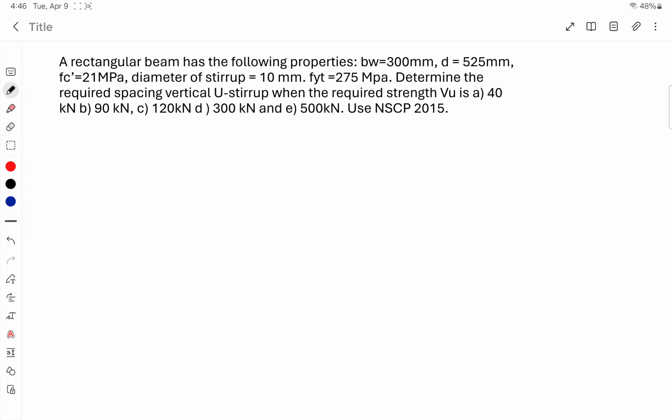So let's number this problem 1. We have a rectangular beam with the following properties. We have the BW or B equal to 300. Let's draw it first. Okay, hindi siya pantay, okay.

We have the BW 300 and then the D or the effective depth, which is equal to 525. We also have the strength of concrete FC prime 21 MPa, the diameter of stirrups at 10 mm, and then FYT at 275. So the unknown here is the required spacing for the vertical stirrup.

S is what we're looking for here, when the required strength VU is varying each problem or item. So letter A, we have the VU which is equivalent to 40 kilonewton.

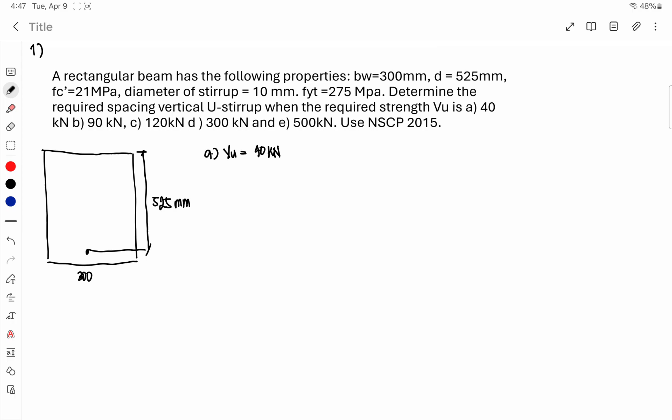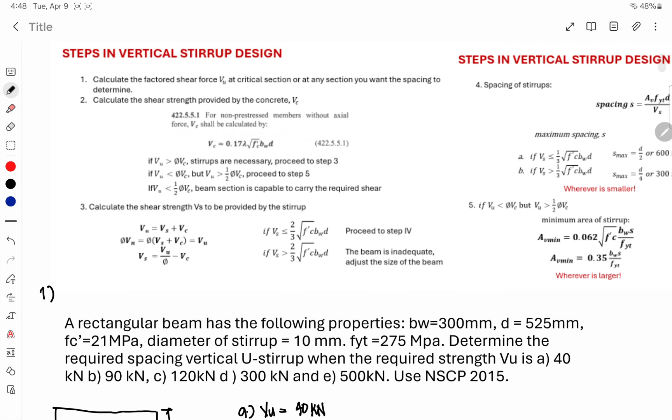Okay, so let's do letter A first. Let's check again our process or steps in vertical stirrup design. So first, calculate the shear force VU. But in our case, VU is given, so this is what we'll use.

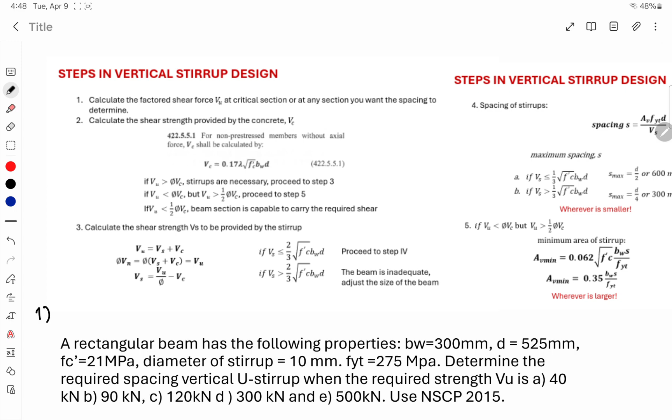Okay, so next, calculate the shear strength provided by the concrete, VC, wherein for non-prestressed beams without axial force NU, VC shall be calculated by this formula. We have VC, so let's compute first the VC.

We have the formula 0.17 lambda root FC prime BW D. We can also use 1/6 since it's more exact, no? So let's just use 1/6 so it's better.

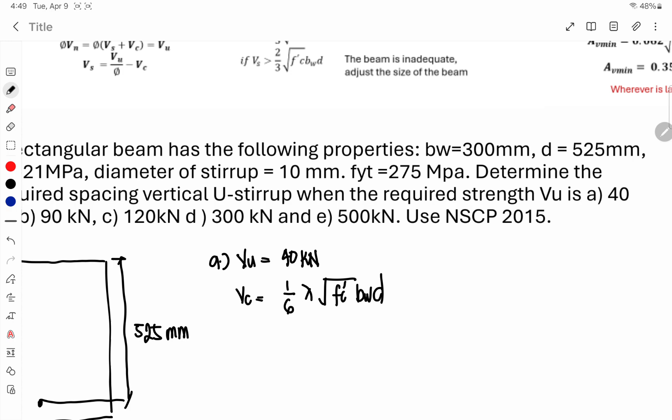So this is the strength provided by the concrete.

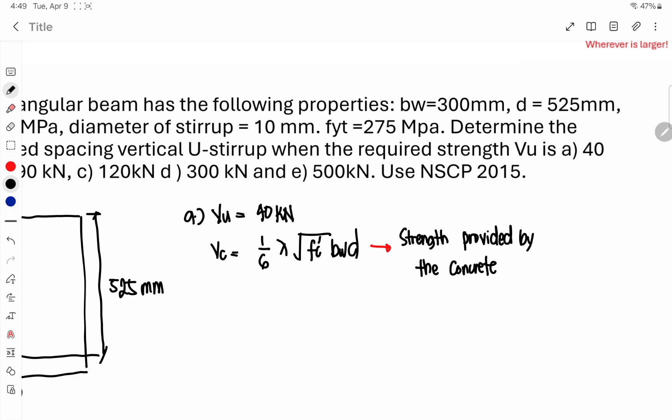So let's compute it first. This is the second step. Our VC, we have 1/6.

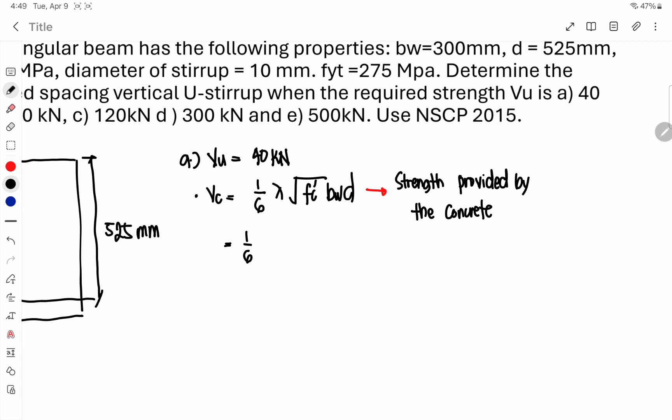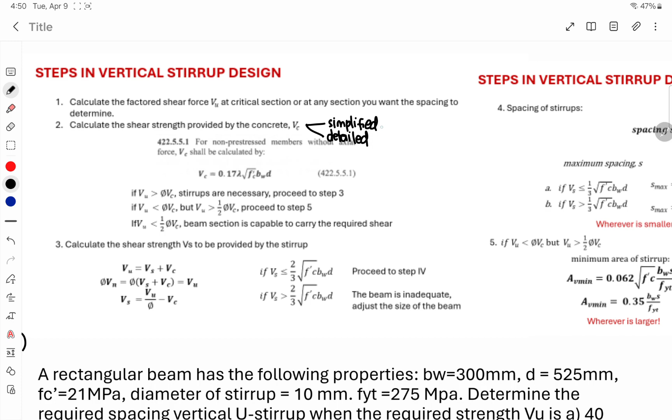So here it's divided into two processes. We have the simplified VC, which we discussed previously, and then we have the detailed one, wherein in our problem, when it's not stated whether detailed or simplified computations should be used, we will use the simplified calculations. So in our case, let's use the simplified calculations, this is the formula. The detailed one we already discussed is in the PowerPoint.

So the simplified one is this. For our lambda, the problem didn't state what kind of concrete, so we will use lambda equivalent to 1, wherein 1 is normal weight concrete. When it's not stated, we automatically assume normal weight.

Then we have the square root of FC prime, which is 21 MPa, and the BW or width of the beam at 300, and the depth or effective depth at 525.

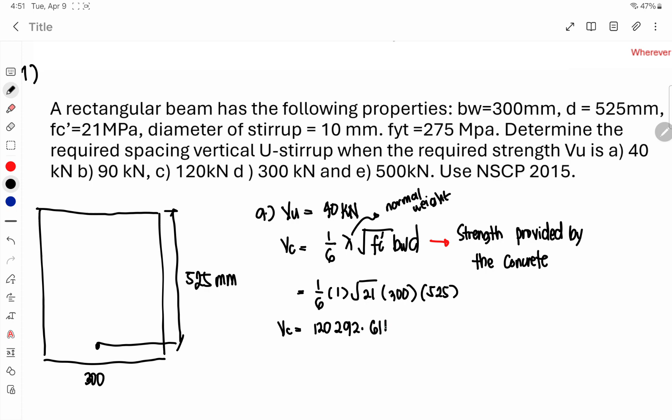So computing for the value of VC, we can get 120... 0.29, I think. Let me double check. Yan, tama. So we can compute this since it's in mm and this is MPa, so we can compute this in Newton. 120,292.612 Newton.

So we want it in kilonewton since that's what we need. So let's convert it. Divided by 1,000, we have 120.293 kilonewton. So that's the value of VC.

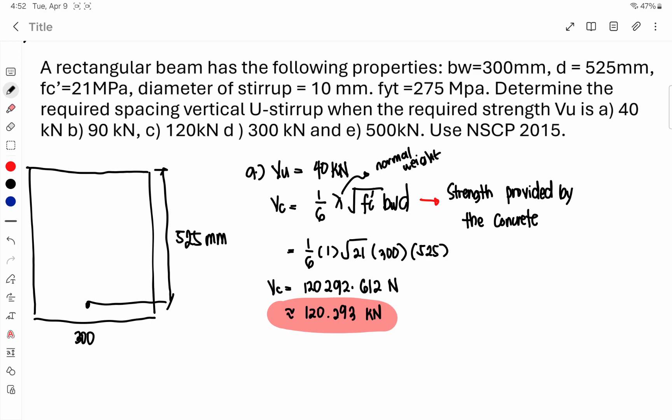So next, let's solve this. Let's check the value of phi VC.

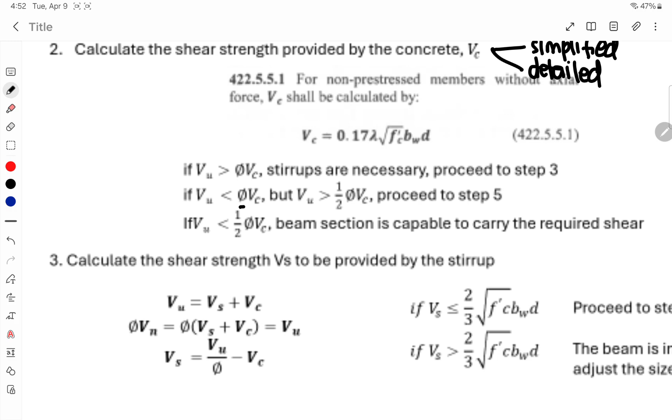If VU is greater than phi VC, we will proceed to step 3. If it's less than, but greater than half of it, we will proceed to step 5.

In step 5, we compute the minimum area of stirrup. And then lastly, if less than, the beam section is capable to carry the required shear.

So meaning, no more computations needed, we stop here. The beam section is capable to carry the required shear, so we don't even need to compute the spacing anymore, that's already our answer.

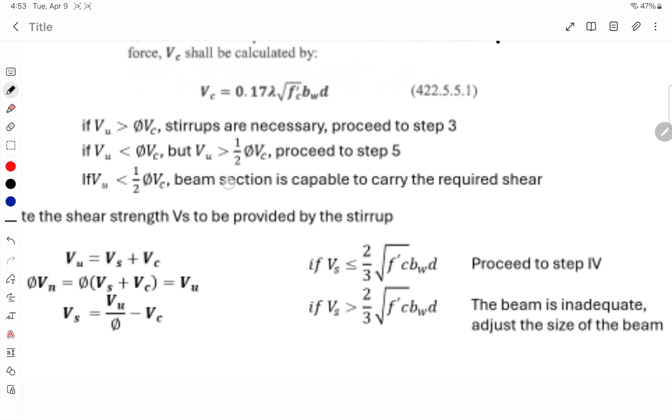Okay let's try it. So let's compute first the value of phi. Let's do it here, on the other side. Letter A pa lang naman. Phi VC - our phi for shear is always 0.75.

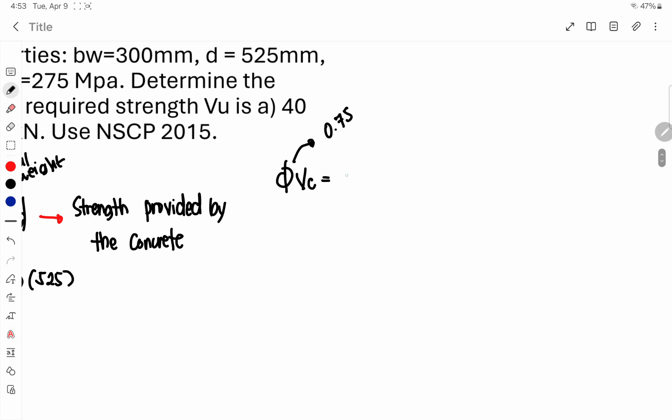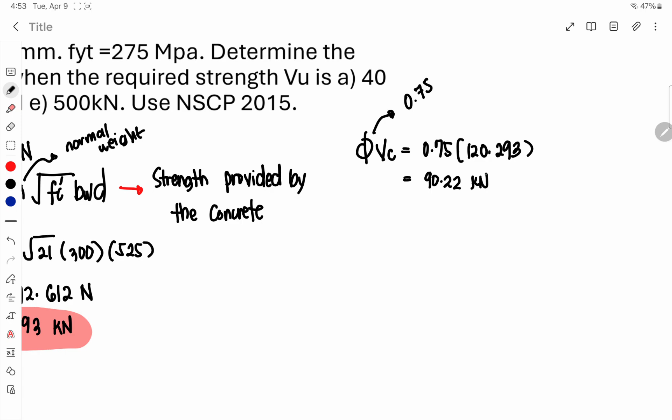0.75 multiplied by the VC, 120.293. We can get the value of phi VC, which is 90.22 kilonewton.

So let's compare this value to VU. We have our VU equal to 40 kilonewton. So is it less than or greater than? Our VU is less than the value of phi VC.

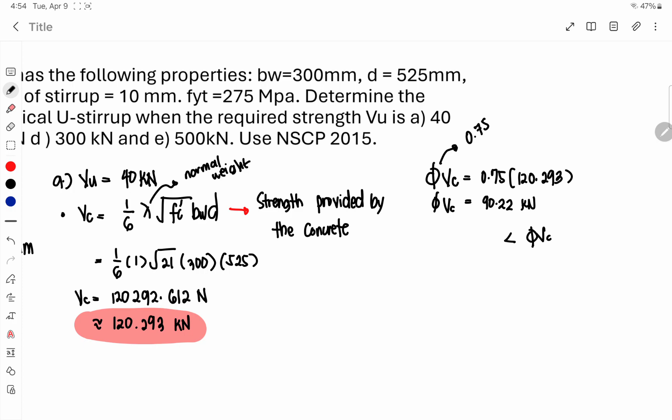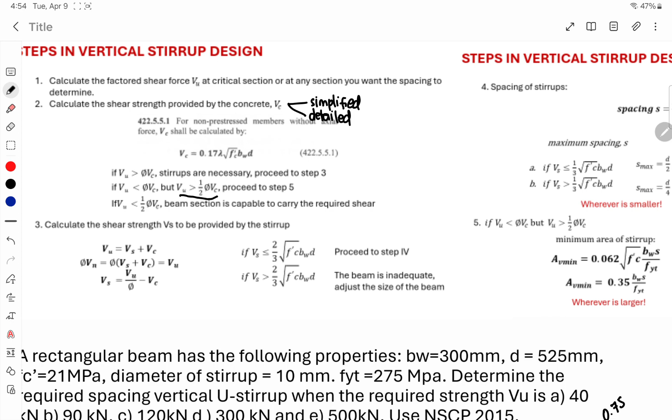So, ano ang pwede nating sabihin? Kapag less than, ito na. Kailangan nating i-check yung value pa ng kalahati nito. So yung VU natin, VU is less than phi VC. Kailangan nating i-check pa ito, yung kalahati ng phi VC. So 1/2 phi VC, divide 2 nyo lang, equals 45.109 kilonewton. So as you can see, yung VU natin is less than pa rin dito sa value ng 1/2 phi VC. So therefore, yung VU natin is less than pa rin 1/2 phi VC.

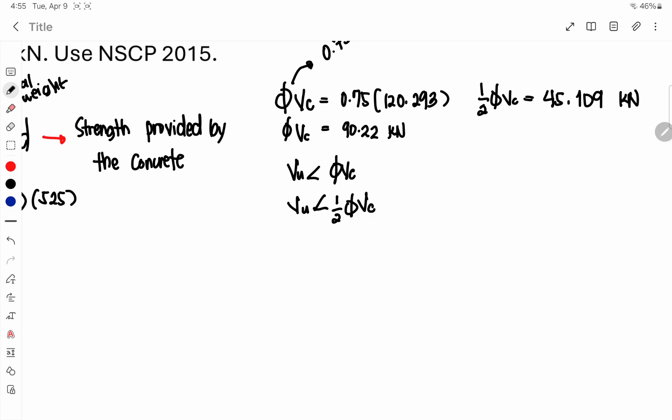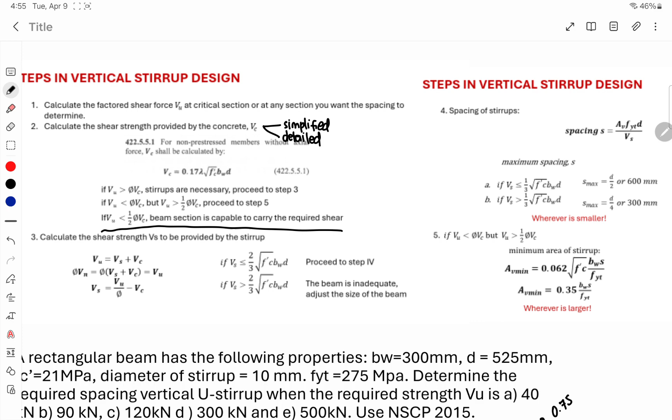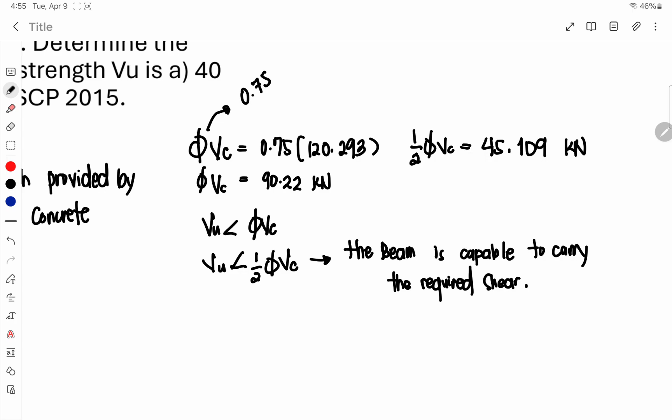Therefore, yung procedure natin dito is this: the beam is section. So with these calculations, with a given value of VU na 40, the beam is capable to carry the required shear. Yun na yung sagot. Okay, letter A. Easy peasy, 5 points.

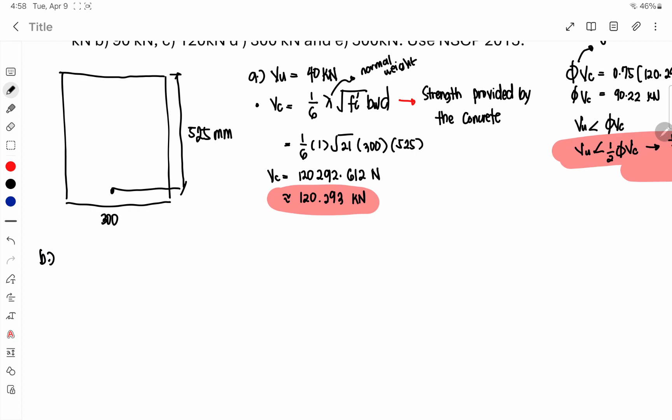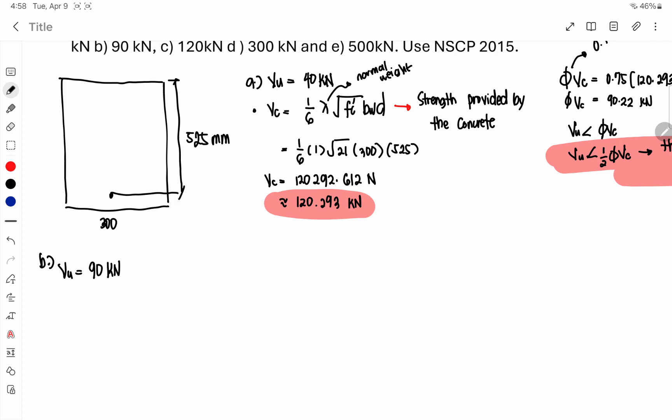So next, we have letter B, which is equal to, yung VU natin is equal to 90 kilonewtons. So same, meron na din tayong VC. Same lang naman yung VC sa lahatan, no? So we can check already the value ng φVc. φVc natin is equal to 90.22. So greater than pa rin siya, tama? I mean less than pa rin siya, no?

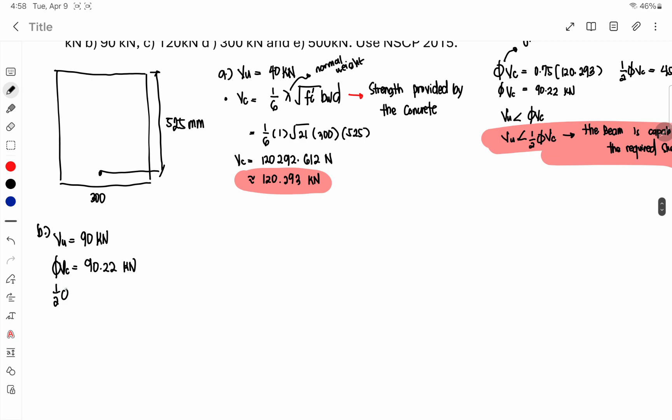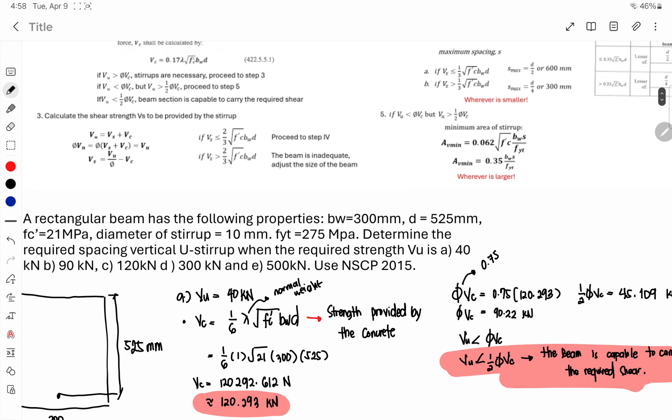But greater than na siya sa 1/2 φVc. 1/2 φVc, which is equal to 45.109 kilonewton. So with this, pwede nating i-determine yung condition nito. VU is less than φVc, which is correct, since yung 90 natin is mas maliit compared sa 90.22. So here we have VU is less than φVc, but greater than sa 1/2 φVc. Nagets ito?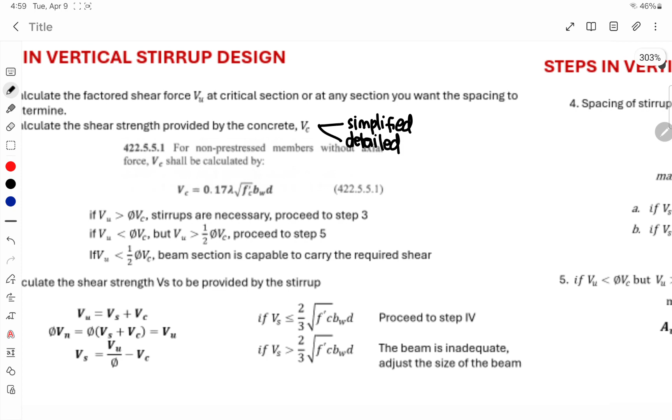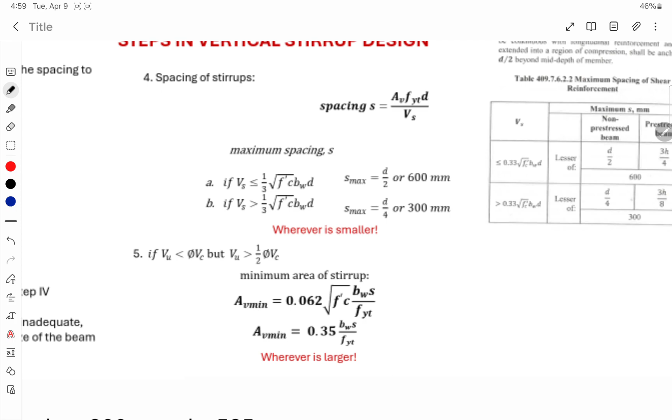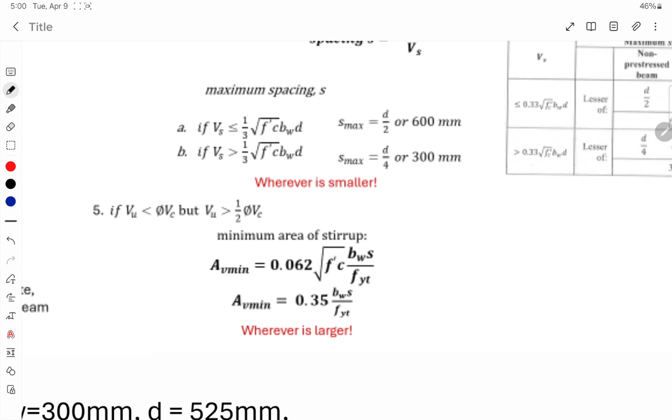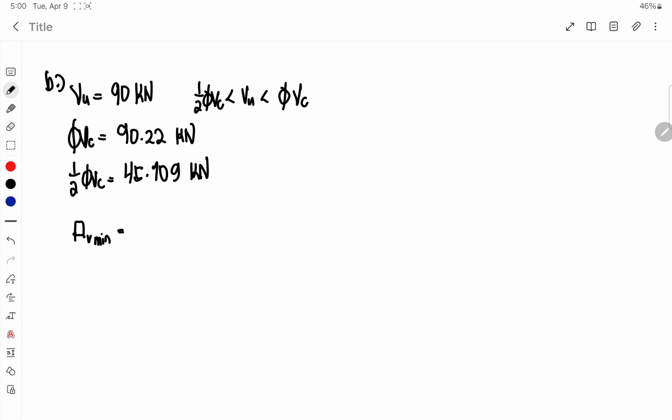So with this, proceed daw tayo sa step 5. Wherein yung step 5 natin is equal to ito: if VU is less than phi VC but VU is greater than 1/2 phi VC, ito na yung gagamitin natin. Wherein makakompute na tayo kaagad ng value ng spacing, no? So paano natin ma-solve to? We have 1/2 phi VC, VU, phi VC. So kailangan natin isulat lang yung area minimum natin, area ng stirrup na minimum, which is equal to, meron tayong dalawang pagpipilian dito. Tapos kung alin yung mas malaki, of course, pero kailangan natin i-check siya both, no?

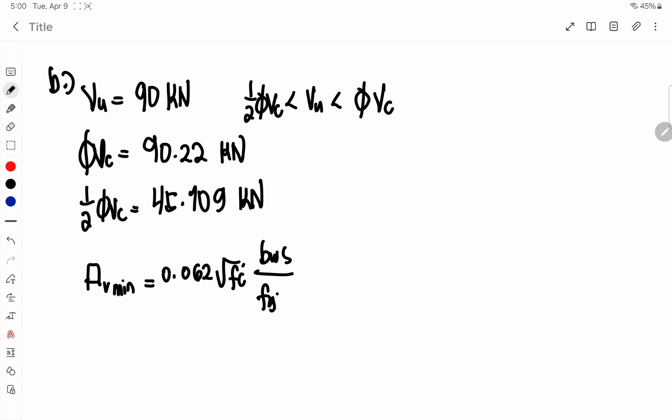So ayan, check natin. AV min, we have 0.062 square root of FC prime, BWS over FYT. And then isa pang AV min is 0.35 BWS over FYT. So meron na kayong given na formula. So with this, kaya nating ma-solve yung spacing natin both. Yung spacing natin dito, yung kukunin natin, syempre yung mas maliit. Tama, spacing yan eh.

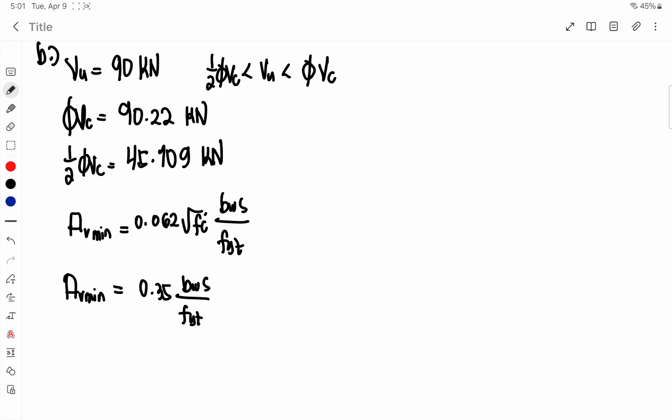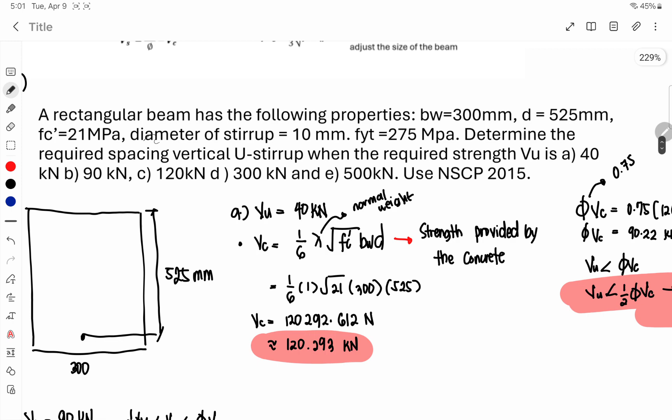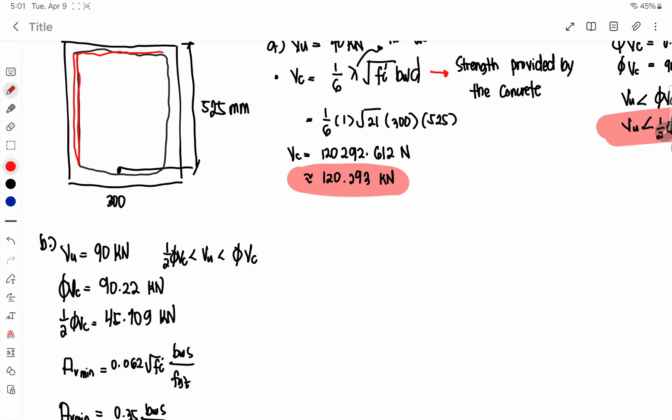So ano ba yung AV min natin? Sa problem natin, yan na yung area ng stirrup. So with this, binigay naman sa atin yung diameter of stirrup na 10 mm. At yung AV min natin is yung area ng stirrup na nagre-resist ng shear. So kung ito yung stirrup natin, saglit na, ayusin ko na. Ito, so yung shear natin is pag ganito, may dalawang force na nagre-resist kasama yung concrete. Ito na yung area ng AV natin, or yung ating area ng stirrups, wherein i-consider natin kung ilang legs yung stirrups natin. Hindi naman pwedeng isa lang yan, no? So sa ating case, kapag hindi sinabi, automatic assume natin is dalawang legs.

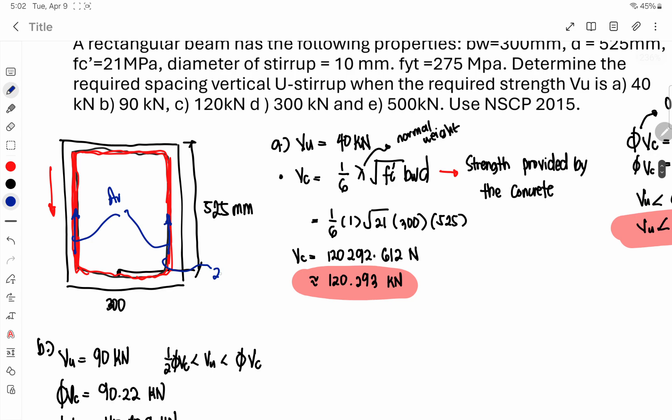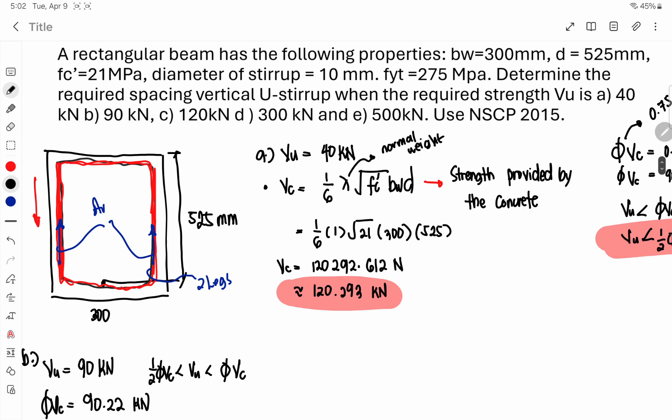Okay, so isulat natin dito yung AV min. We have pi over 4. Ilan yung diameter niya? We have 10 mm, 10 squared times 2, since 2 legs. Okay, it is equal to 0.062 square root of FC prime 21. Okay lang, so we have the BW na 300, and then the S na unknown, all over FYT na given, we have 275. So with this, we can compute for the value of S. S natin is around 506.

O ito, simplify nyo na lang siya para mas madali, no? So pwede nyo gawin is S is equal to, itaas nyo doon, AV min times FYT, tapos ibaba nyo yung 0.062 para di na kayo mag-ship solve ng BW. Ganun. Minimum area of shear reinforcement, diameter ng bars, pi over 4 then squared 2, FYT 275 divided by 0.062 square root of FC prime 21 times the value ng BW. So tama, 506.79 mm.

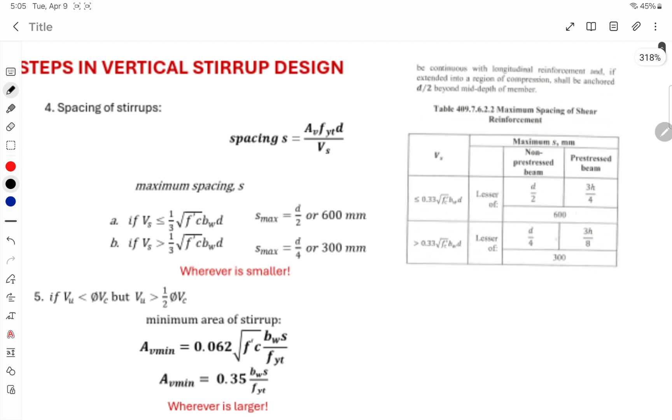Okay, so ito na ba yung sagot? Pipili lang na mas maliit tapos ito na? Hindi, no? So kailangan natin i-check, of course, yung maximum spacing of shear reinforcement natin. Kailangan natin i-check to kasi what if yung maximum pala is 200 lang, so lalagpas na ito. Kung ma-observe nyo, malalaki yung spacing niyan since yung VU natin is maliit lang. So kapag maliit lang yung VU natin, kokonti lang yung i-resist ng ating shear reinforcement, kaya kahit luwagan natin, 'di ba?

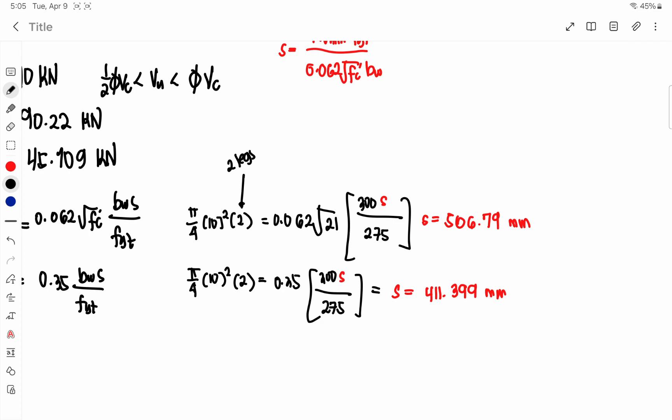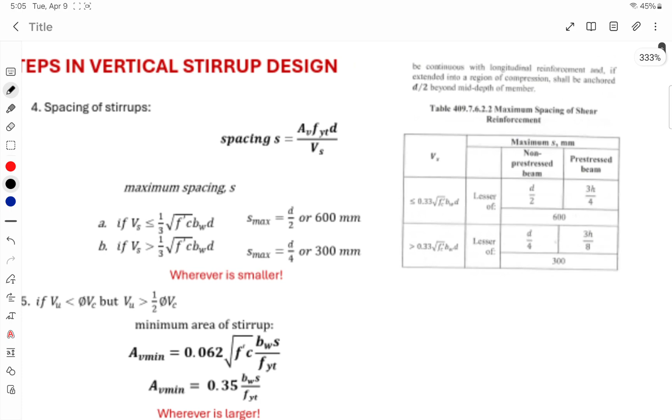Kahit luwagan natin yung spacing, okay na okay tayo. Pero dapat hindi tayo lumampas sa maximum spacing niya. So with this, kapag mas maliit yung VU natin, of course, yung gagamitin nating maximum spacing dito is ito. Kapag malaki naman, kailangan masinsin dapat. So ito naman yung pipiliin nyo.

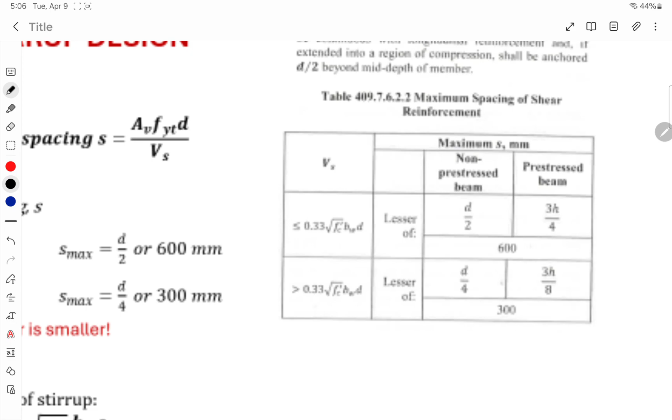Pero in our case, ito yung pipiliin nyo since naka minimum naman. Kapag minimum, automatic ito na yung gagamitin nyo. Minimum lang naman, so kapag minimum, ito yung gagamitin nyo. So we have the D over 2. Lagay lang natin dito, tapos 600 S.

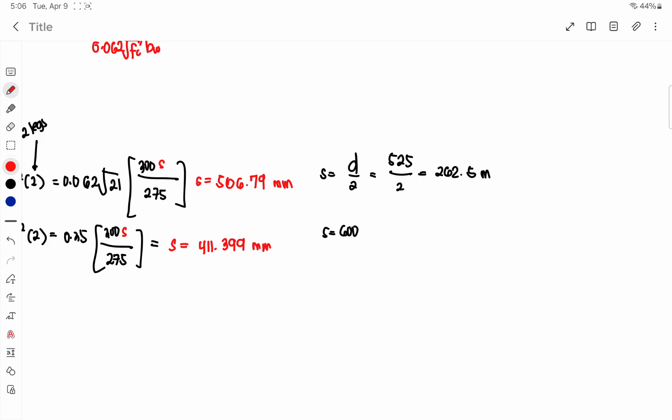So D over 2 natin is we have D na 525 divided by 2, we have 262.5. So among the four, we can say that the lesser value or the smallest value of spacing is this one. So nagpara-compute pa tayo nito, pero ito lang yung gagamitin. So of course, kailangan nyo din ma-check, ito yung maximum.

For letter C, we have the value of VU na 120. Ay, shucks.

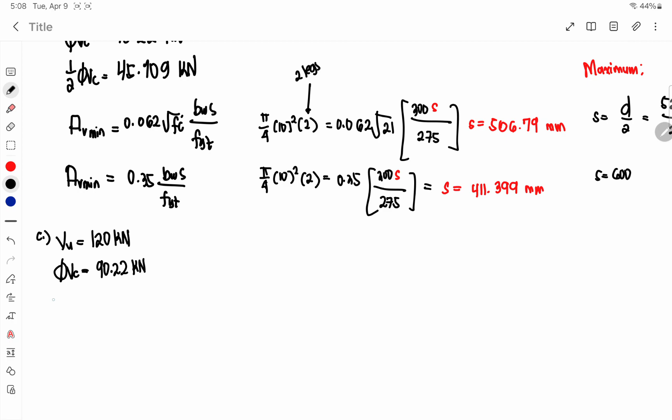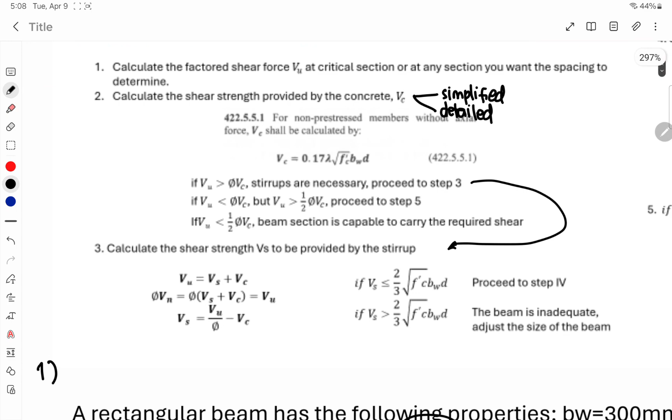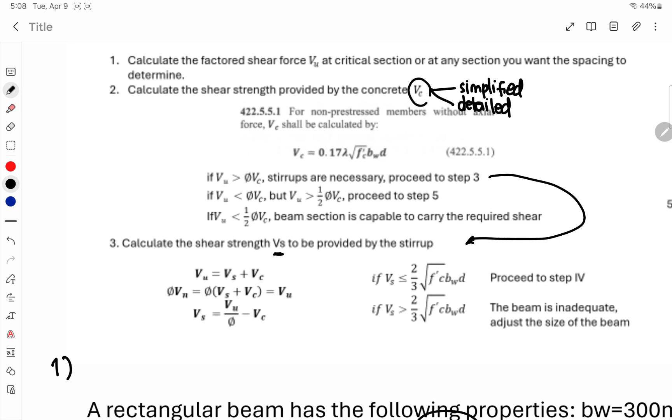So ayan, check natin yung phi VC natin, we have 90.22. So greater than na yung VU natin sa phi VC. Therefore, proceed tayo dito sa step number 3 na calculate the shear strength VS to be provided by the stirrup. So kung yung VC natin is provided by the concrete, ito naman VS is provided by the stirrup.

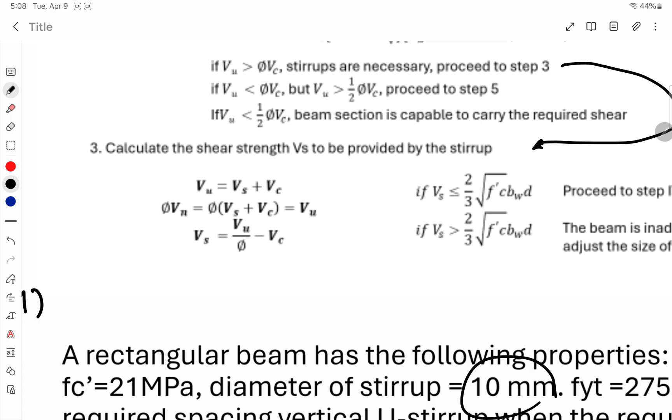Wherein, to compute, meron naman tayong main equation dito na VU is equal to VS plus VC. Okay, so VS natin is equal to VU over phi minus VC. Compute for VS, we have the value of 120

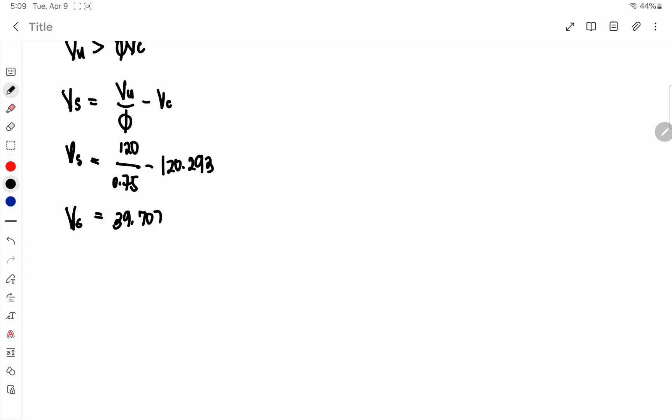over phi na 0.75 minus VC na, magkano yung VC natin? 120.293. VS is equal to 39.707 kilonewton. So with this, meron na kayong VS.

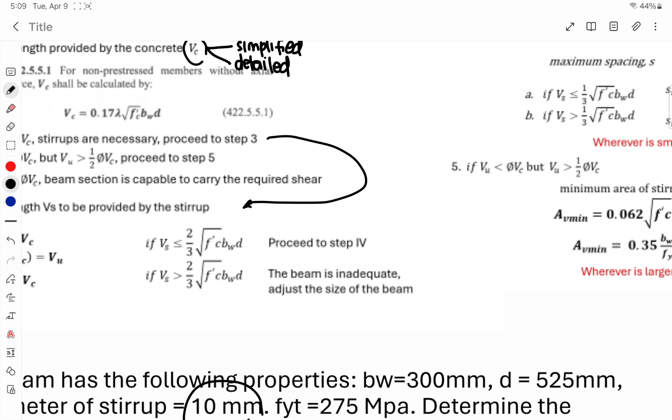Next step nyo is compare the VS into this 2/3 of FC prime BWD. Kapag less than yung nakuha nyo sa 2/3, proceed kayo sa step number 4, spacing of stirrups. Kapag naman greater than, the beam is inadequate, meaning mag-adjust kayo ng sizes ng beam. Palitan nyo yung size ng beam, tapos proceed ulit kayo sa step 1.

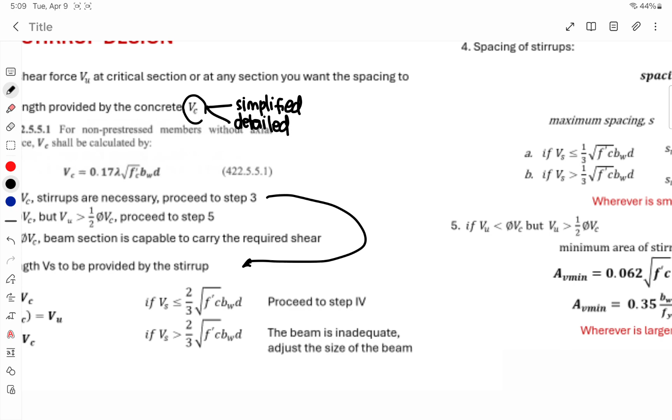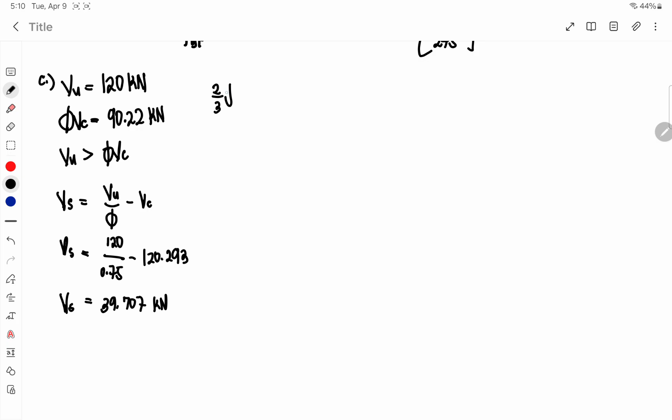Okay, so in our case, check lang natin yung value ng 2/3 square root of FC prime BWD. 2/3 natin is equal to, yung 2/3 FC prime natin is equal to 21. We have 300 and then the D na 525. Value of this is equal to 2/3 FC prime 21, 300, 525. We have 481.170 kilonewton.

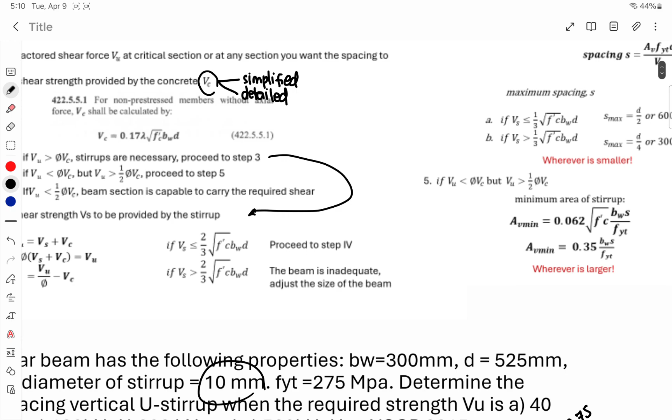So ano nakikita natin dito? We have VS is less than, very very less than. So meaning, VS natin is less than 481.70. Proceed to step number 4. Kaya na nga natin ang step 1, 2, 3, 4.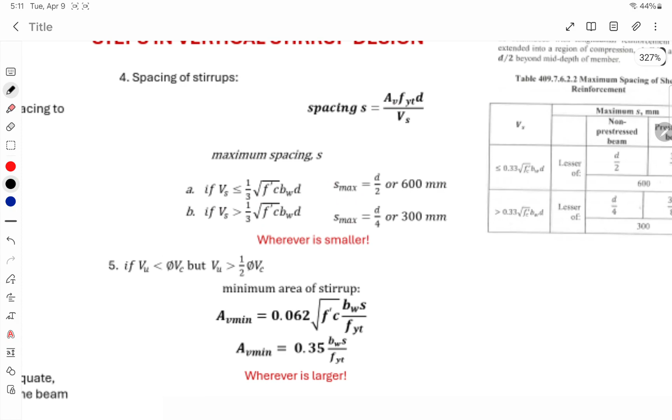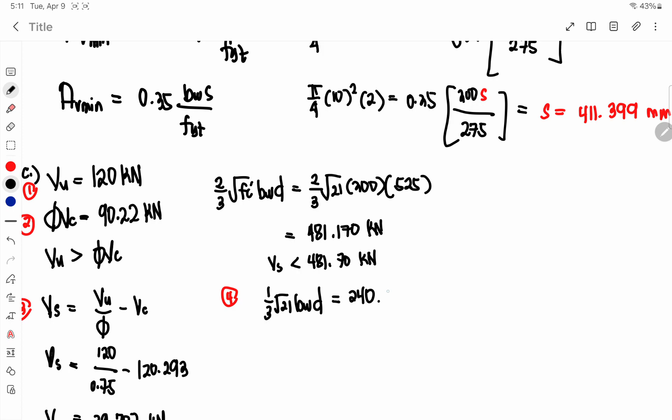Step number 4 natin, compared naman natin ulit yung VS natin into this 1/3 FC prime BWD. So check lang natin, palitan nyo lang to ng 1, yung 2/3 nyo naging 1/3. 1/3 natin of square root of FC prime BWD is equal to 240.585 kilonewton. So from this, may check natin yung VS natin is less than 240.585 kilonewton.

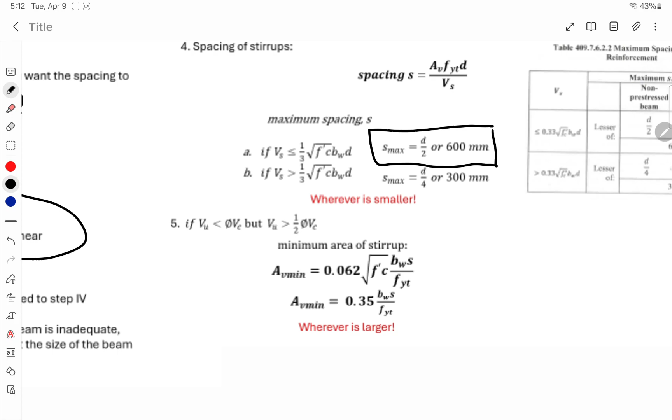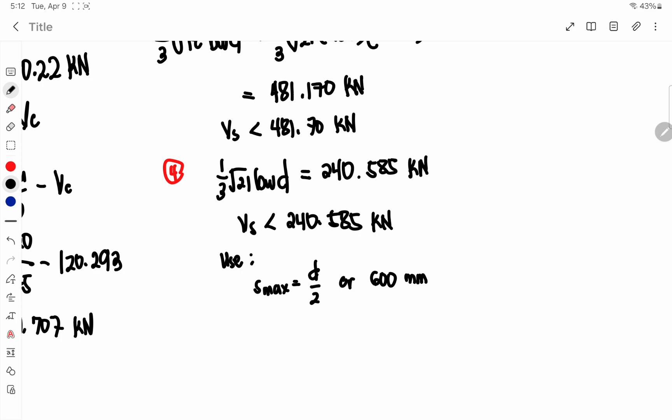So meaning less than tayo, so meaning yung S max natin na gamitin is yung mas maluwag. Kapag mas maliit yung VS, kakonti lang naman yung i-carry niya. So kahit luwagan natin, we can use S max na D over 2 or 600 mm. And of course, kailangan nyo din i-check yung value ng spacing niya mismo, galing dito sa VS. Ito na.

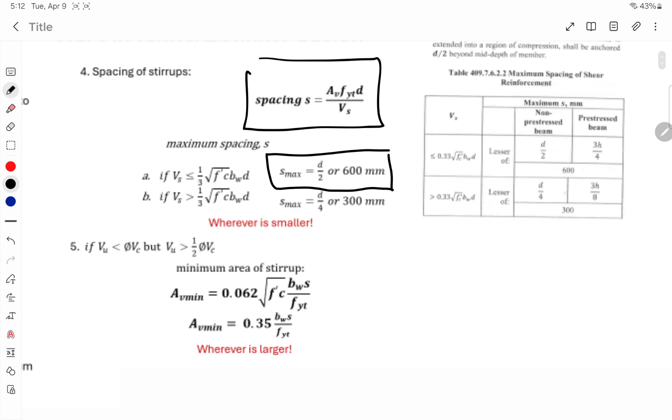We have AV, FYTD, and then V over VS. Yung S natin is equal to AV, FYTD over VS. Tama. Tama yan, wait naman hindi.

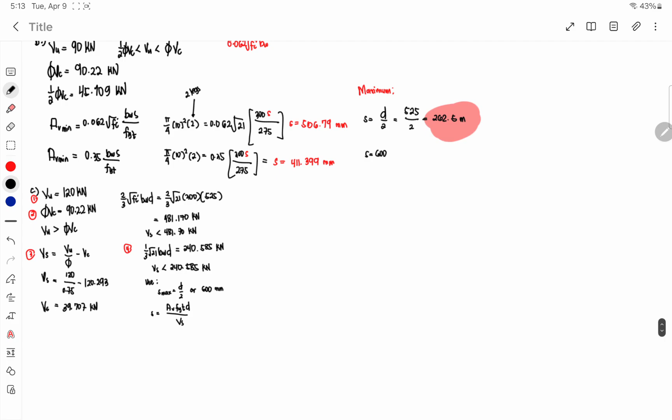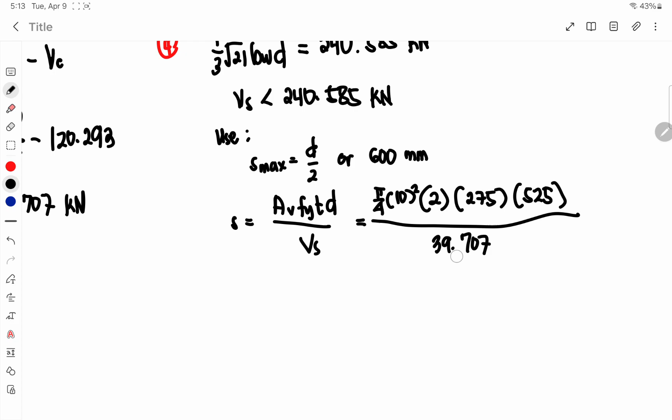Yung S natin is, yung AV natin is pi over 4, 10 squared, we have the value of 2 kasi 2 legs. Tapos FYT natin, 275, tapos yung D natin, we have 525. Over VS natin na 39.707, or in Newton pala to, 39,707 since naka-mm siya. Yung spacing natin dito is equal to 571.14

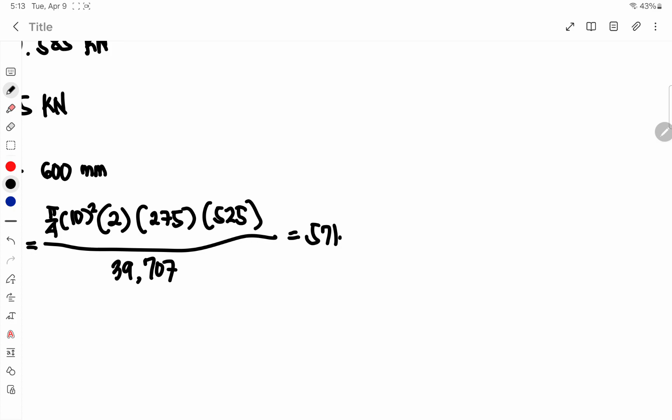mm. So among the three, yung D over 2 natin is equal to 262.5 ulit yun. So among the three, 600, 262, and 571, ano yung pinakamaliit? So we have here the value of D over 2 and the spacing.

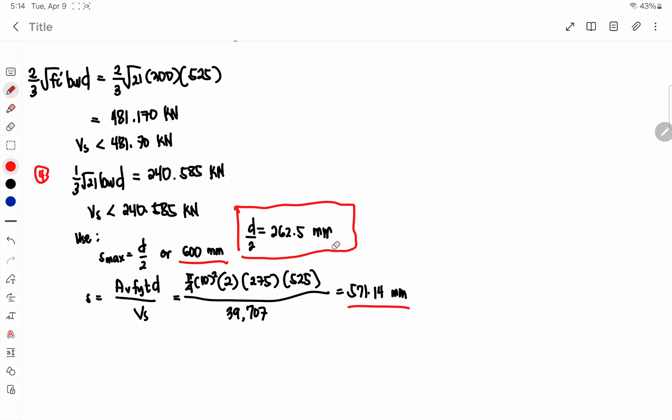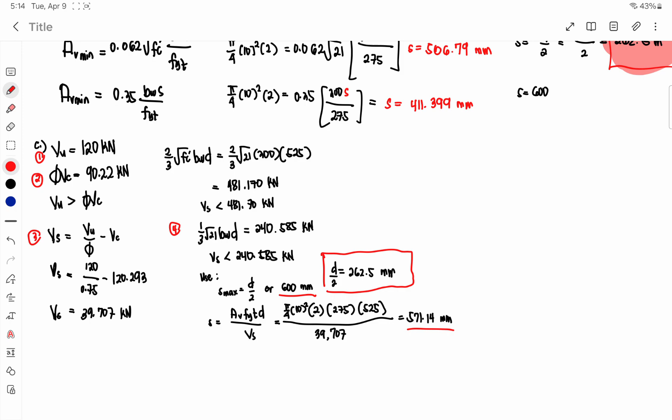Picture. So ganun lang po, may ano naman, may guide naman. So try nyo yung last letter D and letter E for you to practice na din. So ganun yung concept. Ito na.

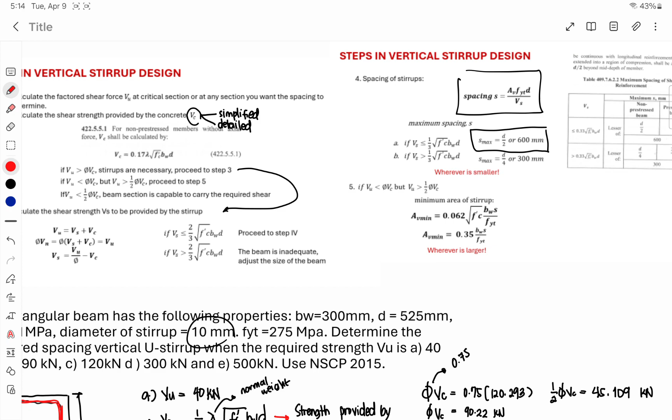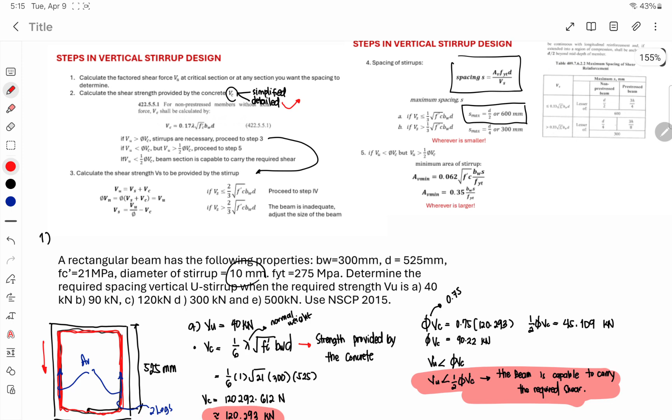Tapos nagamit na din natin lahat ng steps. So mostly sa shear in beams, ganito lang yung mga tanungan, no? You have the spacing sa mga board exam. Tapos pag minsan kapag medyo gusto nilang nilagyan ng detail, dapat aware din kayo sa mga formulas and detail calculations. So all in all, ito naman yung parating nagagamit. Okay, so ayan, screenshot.